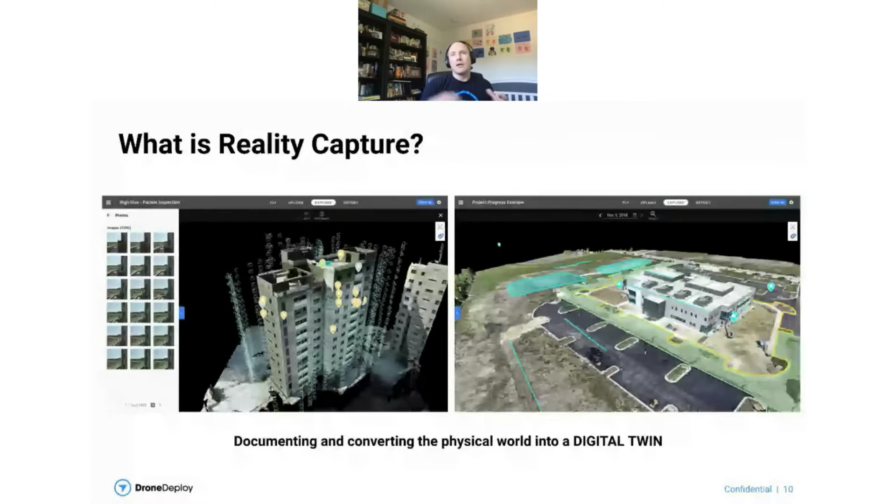While having digital twins or a digital version of some part of the job site has been around for a long time with more traditional surveying methods, one of the big improvements that drones provide, and these digital solutions provide, is that these can be done far more easily, far more rapidly, and therefore far more frequently. We can now start to have these digital twins produced on a daily basis, meaning inspections can be run far more frequently.

A brief overview of what DroneDeploy does and provides: the idea is it provides that entire workflow from beginning to end, starting with the acquisition of digital data, whether that's flying drones and taking photos and panos and videos, or taking 360 videos and 360 photos, which I'll talk more about later.

Now we've got that data, how do we turn it into something useful? We have a cloud processing engine, so you upload all of that data to our cloud processing platform, turning that into useful assets, whether that's 3D models, orthomosaics, elevation models, point clouds, video walkthroughs, streamable videos, that kind of stuff. But now we've got these pretty pictures and nice models - what do we do with that?

Well, we now have to perform analysis. We have to do measurements, annotations, comparing, counting, preparing reports, and sharing. All of those tools are based on our cloud platform, allowing you to do that from anywhere in the world, so it doesn't have to be the person on site anymore - you can have that analysis done back in the office.

We've done some analysis, we've got some measurements, but still that's not the desired end result. The desired end result is taking some action from that data. That could be sharing a report with the relevant stakeholders or project owners, producing actions and work orders which are pushed into construction management software, and updating the progress reporting. All of those parts represent the full life cycle of taking action from this digital twin and this reality capture.

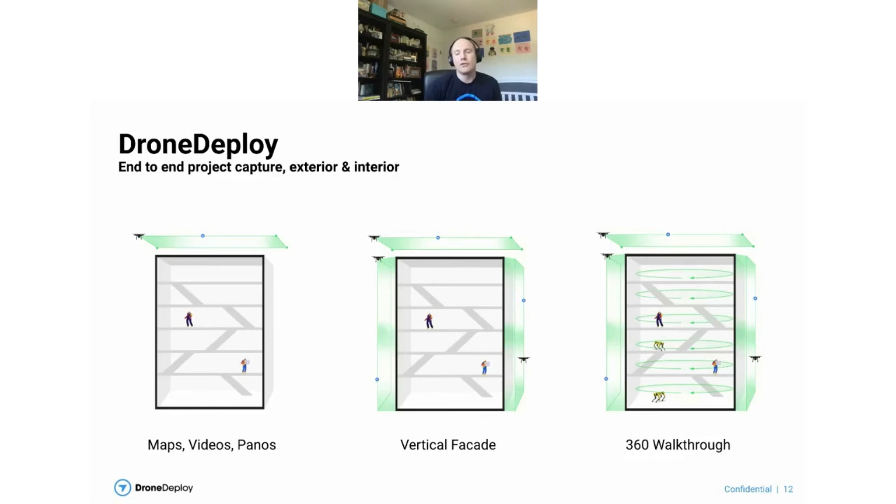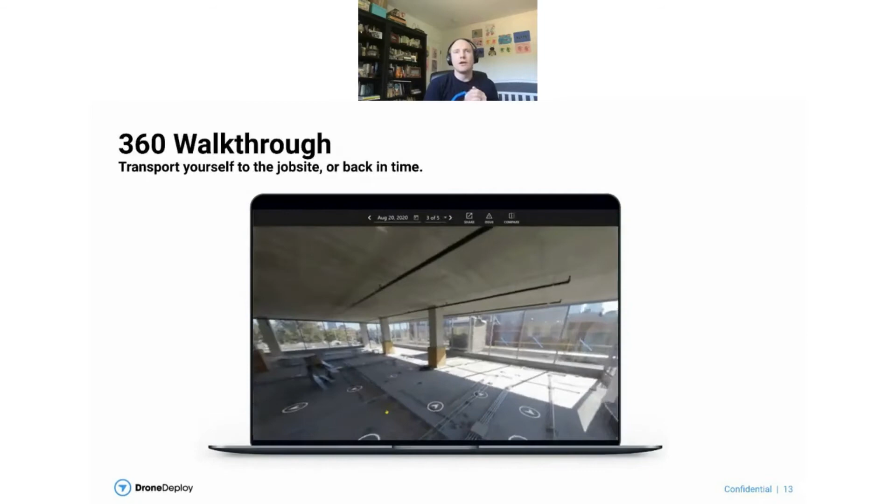Let's talk a little bit more about the 360 walkthrough product, as it's a newer product, and I'd assume most folks here are very familiar with drone mapping and producing 3D models and flying drones around and having that kind of mapping. But I think the 360 walkthrough is certainly a fair bit newer than that.

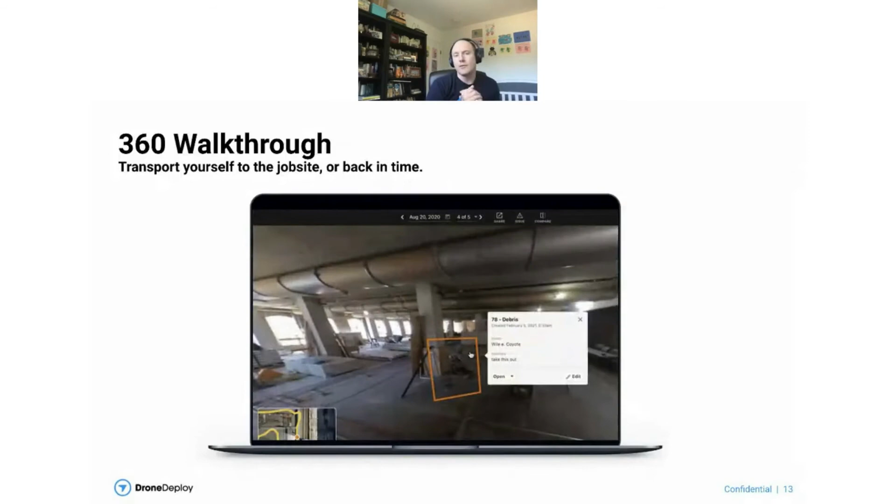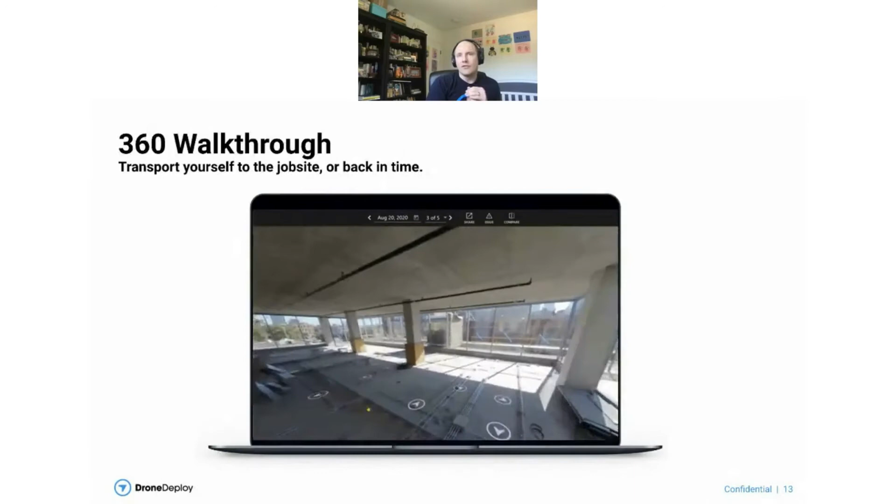This really allows you to go and perform those inspections on the inside of buildings, kind of the main use case there. The idea is you walk through your job site with a 360 camera, and that's taking 360 videos - where every single frame is a full 360 panorama, basically.

And then you can upload that to DroneDeploy, and we process that. As you saw, there's the squiggly line there that shows the actual path you walk through, which allows you to swipe through and jump through, go forwards and backwards in time, move to any point on your walkthrough, pause, and look around in all directions.

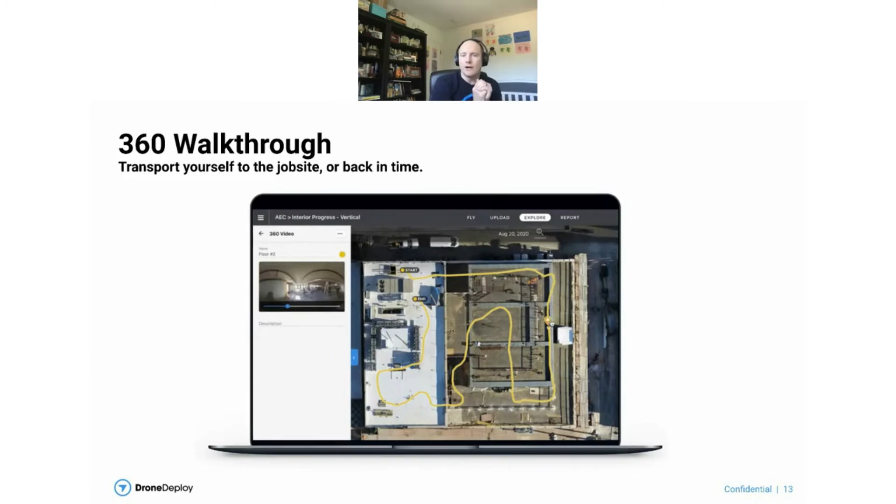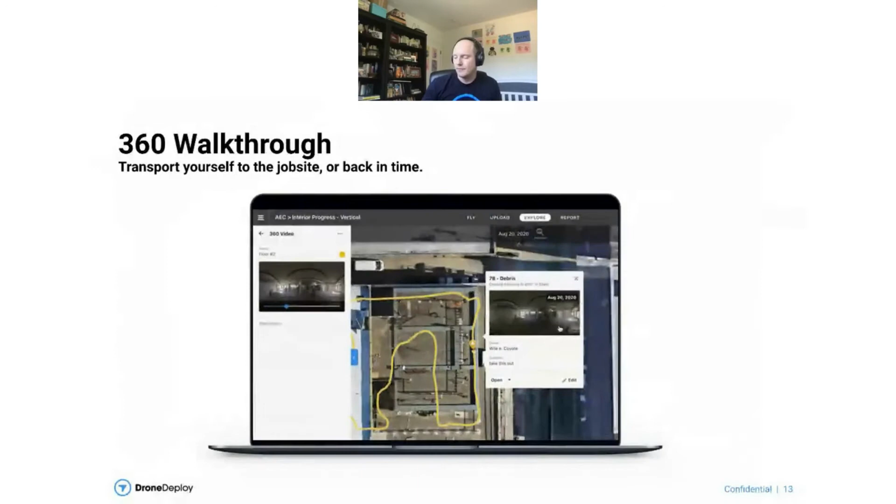That allows you to go back, or have someone else back in the office go through and perform that walkthrough and look for things that maybe weren't caught by the person doing the original inspection. The other benefit is comparing change over time - you can perform the same walkthrough of the site on multiple days as the project's progressing, and look at what's changed from one day to the next.

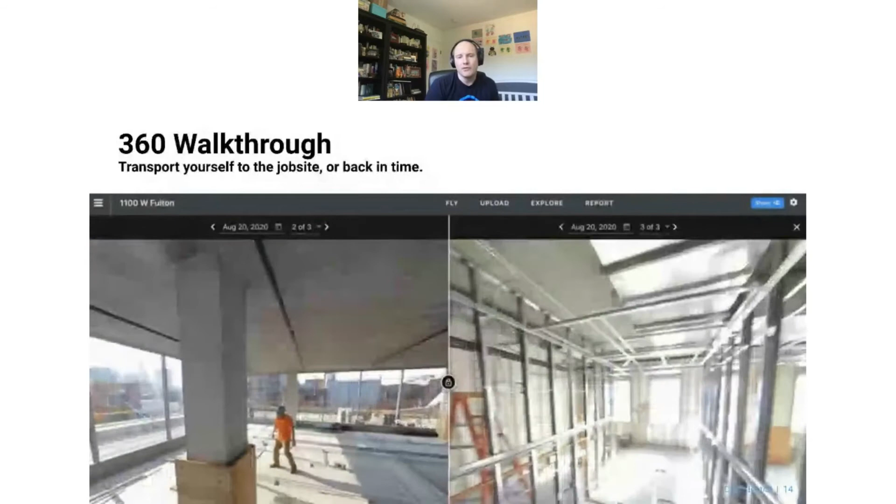You can compare the new construction that's happened, and oftentimes this really benefits because people say, 'Oh hang on, we've put up this wall, but did we put up all the electrical inside it? Was the insulation put up?' And a lot of time that means just pulling down that wall and starting again.

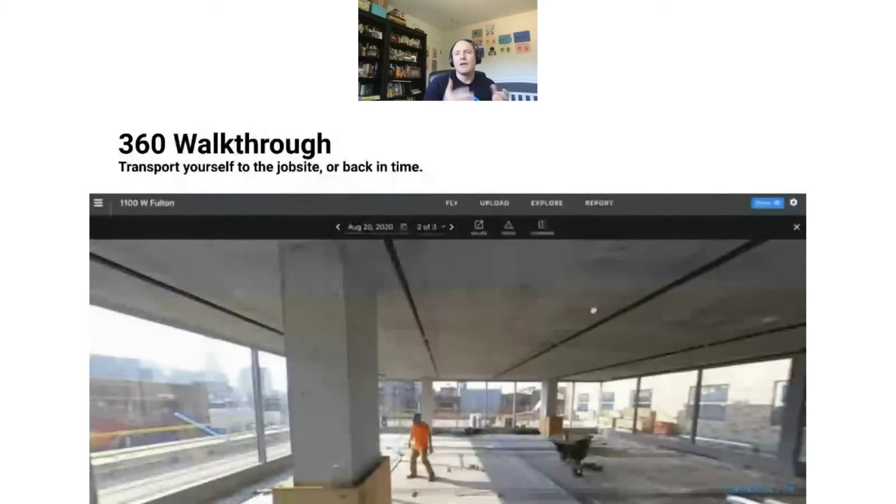But this recreation, this having this record over time, allows you to have a lot more confidence and go back and actually check that without having to go on site or even delay your project.

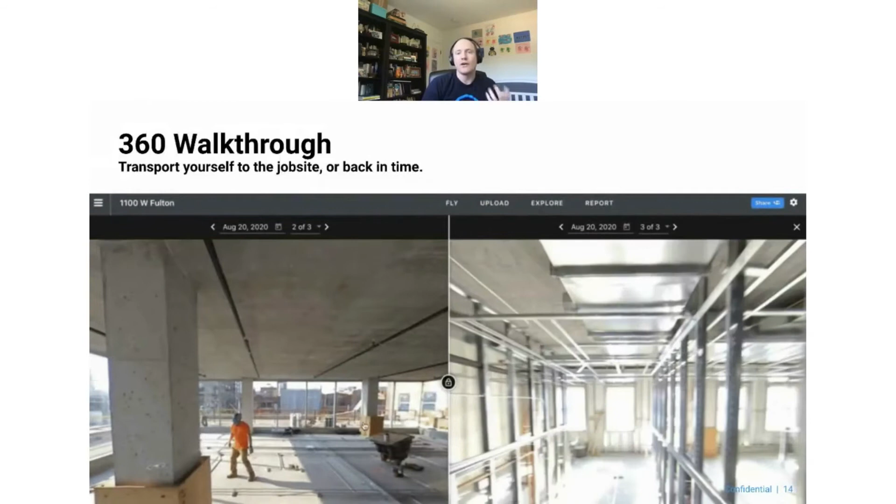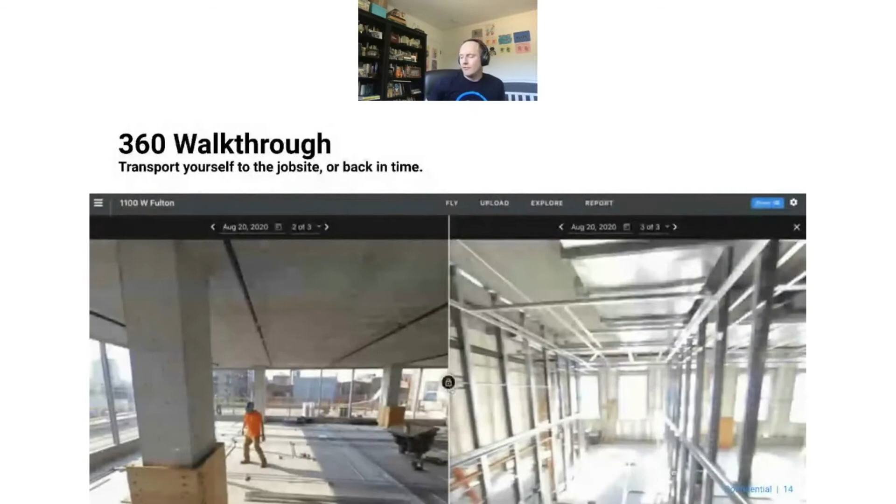So that's been a really exciting product, again targeting the inside of the construction site, and I'm seeing a huge amount of adoption there across the industry. So what are the benefits of this site digitization and creating this digital twin?

As I said before, one of the important parts about site monitoring is doing these inspections. Before, the expert had to be on site doing that inspection, and you're very limited there because there's a limited number of people who can perform those inspections, and the sites are huge. You might have many different projects geographically dispersed, so there's just a physical limit to how often those inspections can be performed.

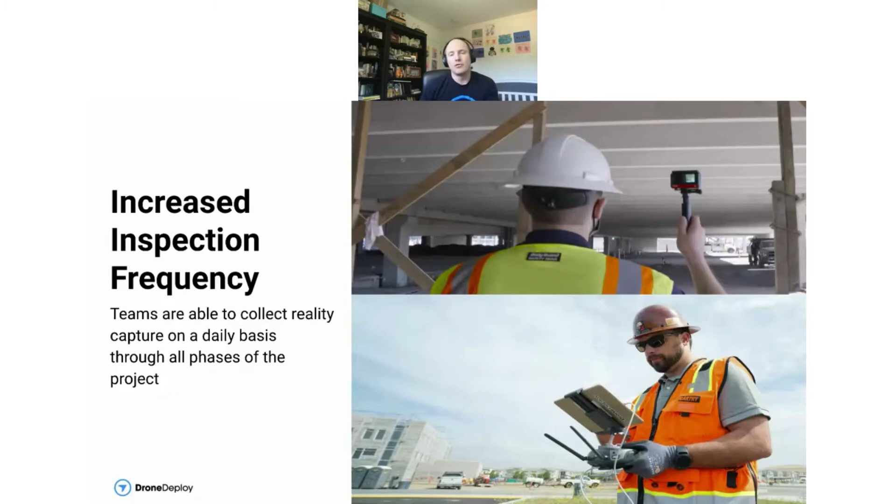But with drone mapping and creating this reality capture, it doesn't need to be the few experts on site going around. We can have a drone pilot or anyone really holding a 360 camera, just walking around the site or mapping it with a drone. Then you can have those experts back in the office looking at these digital replicas of multiple different sites. So it really enables increased inspection frequency, which is driving keeping projects on time.

As we said, they're increasing that kind of visibility. So now we've got that digital twin, the digital replica, hosted online. It means anyone can go and view it, which means you can have people back in the office doing the analysis. It can be shared to the project owners, and it's all in one place. All the information is there, accessible and easy to access. And finally, it improves communication.

That's just another piece of software to learn and use when we already have construction management platforms like Procore or Autodesk, which are being widely used across the construction industry. So it's really important to be able to push that data, that information, and those work orders into those platforms already being used for other aspects of the construction process. That's a large part of what we've done working with folks in the construction industry—making sure we can get the data into those platforms being regularly used as part of their process today.

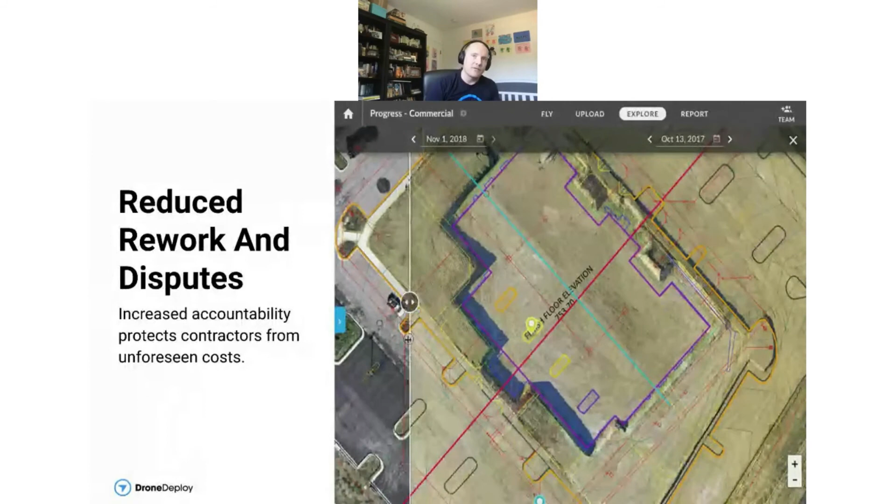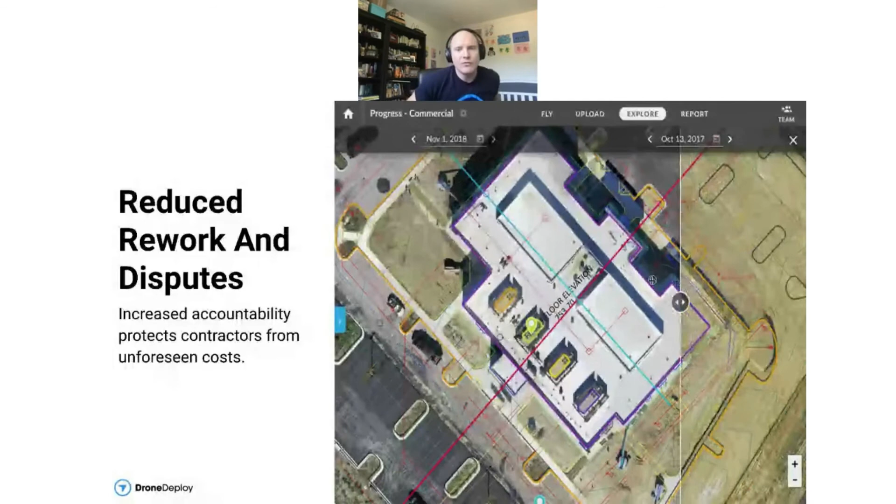A lot of this comes back to rework and disputes, where people say, oh, maybe this was not done properly and it's going to have to be redone, or there's going to be a legal challenge. We've had some customers save millions, potentially tens of millions, in legal disputes because they're able to go back and say, here is a map or a model of the site on day 3 where we put the foundations in according to spec, and just end the conversation there. It's a huge time saver and potentially a cost saver as well. That's been incredibly useful—just having that digital record of the sites.

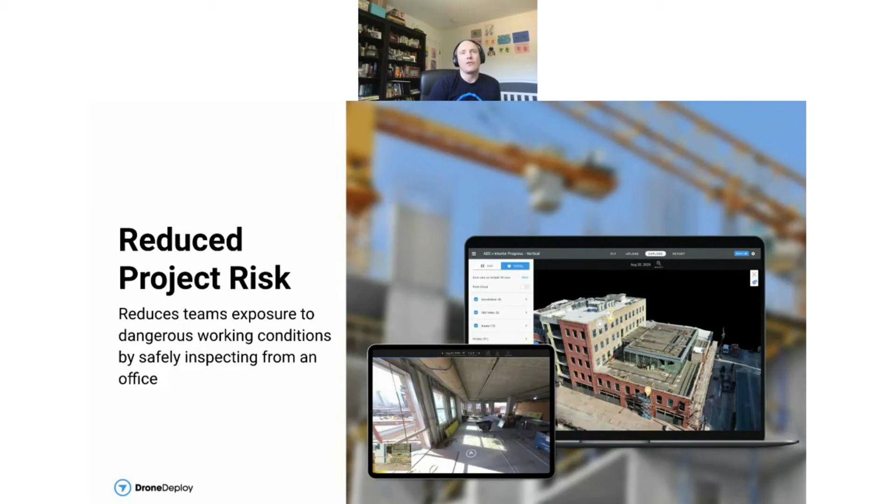And finally, obviously, reducing the project risk—not just in terms of running over time and over budget, but also from a safety point of view. That's one of the biggest factors driving choices in the construction industry: ensuring you have a good safety record, making sure everyone's safe on the site, and reducing the amount of manual and dangerous inspections people have to perform is incredibly powerful. That's been one of the real driving factors for the use of drones, especially around 3D inspection.

So where are we going? Where are we going with DroneDeploy, with our product, and where do we see drones and these digital replicas going within the construction industry?

Well, firstly, it's improving those digital replicas. One of the really exciting things about DroneDeploy being a cloud platform is that as the hardware, the technology, and the sensors improve—with all the different hardware manufacturers and companies producing those—the product and the solution we can provide gets better and better.

It's really exciting, today with the newest iPhones, which have LiDAR scanners built in, you can actually go out and produce a 3D model of a small part of the job site right there without special equipment or training. Potentially everyone on the job site has a LiDAR scanner in their pocket now. We talked about 360 cameras, those are a little bit newer technology, but the resolution and quality is improving over time, and that's going to add to the fidelity of those 360 inspections. And finally, more traditional high quality, wider range LiDAR gives really high accuracy 3D reconstruction of the site.

So where we're going is just bringing more and more of this data in. If we can have access to higher quality, higher fidelity, higher accuracy 3D data about the construction site, faster and more easily, that means we have higher quality digital twins, which gives us more information and allows us to perform the analysis better. That's one of the ways we see this technology going.

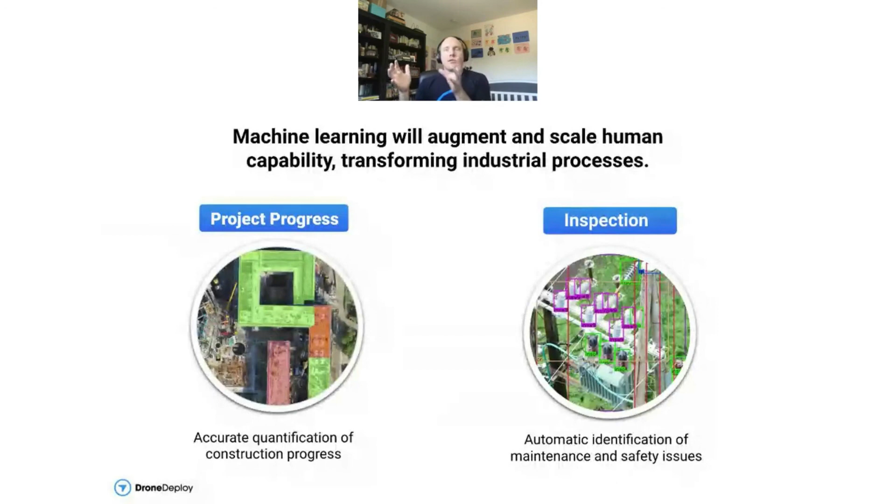Finally, what do we do with that data? We talked about fully automatic, high quality digital twins being captured regularly, but those are still pretty pictures, and what we need to do is perform the analysis, find the issues, produce the actions from that. So we're looking at automated analysis and machine learning to take those digital inspections and, for example, come up with a progress report: we are X% through, or we are this far behind schedule at this point, or there are these issues, this damage found, these safety concerns found on the job site.

If we can add that automation, that machine learning piece, to automatically detect that, now the first interaction we have as humans, as people running and project managing the job site, is we get that action report. So we have the fully automated drone or walking robot capture, acquisition, analysis, and then we get a report saying, this is where you are, you need to have someone go out and look at this or inspect this area. That's definitely where we're going - full automation, simplifying that entire end-to-end process.

Okay, I think that's all I had for you today.